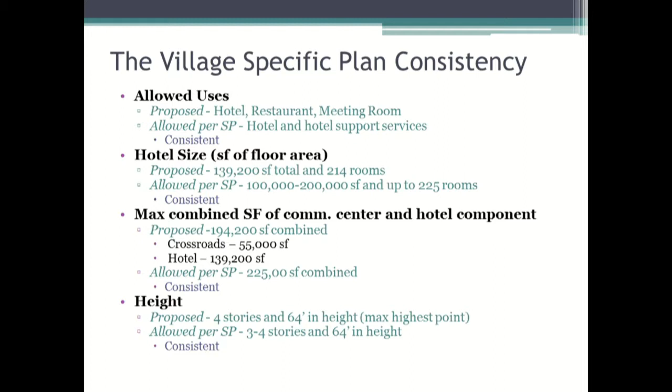So if it's broken down, the Crossroads is approximately 55,000 square feet, and the proposed hotel is 139,200 square feet, for a total of 194,200 square feet, which is well under the maximum allowed per the village-specific plan. The proposed project is 4 stories and a maximum of 64 feet, at the highest point at one of the tower elements, which you'll see in the elevations. The specific plan allows 3 to 4 stories and up to 64 feet in height, so the height component is consistent.

In addition, it is zoned CRSP, so there are standards in the specific plan it has to comply with, but the zoning designation specifically for the hotel site is CR, so any development standards applicable to the CR zone are applicable to this project site. So I thought I would go through a couple of those to summarize how the project is consistent with those development standards.

The standard in the code is 1 parking space per hotel room and 1 space per 5 employees. Based on that calculation, 222 spaces are required and 222 spaces are provided.

Landscaping: the standard in our code for CR zones is that all portions of the setback area fronting streets are landscaped, and along the perimeter of the entire property line, in some places 10, in some places 15 feet, there's a landscape strip of that width. Additionally, there's a requirement in the CR zone that at least 5% of the net site area is landscaped. The plans appear to comply with this requirement, it seems to be at least 5%. However, that's one of the incomplete items we will list, to verify that, do the calculation, and show us on the plans.

In terms of a loading zone, there's no loading zone shown currently on the plans. However, our code for commercial zoned properties does require 1 loading zone, so that'll be another incomplete item we will require them to put in. Additionally, per the village-specific plan, it asks that it's located away from building frontages and away from public uses, so we'll work with the applicant to find a location that will meet those requirements.

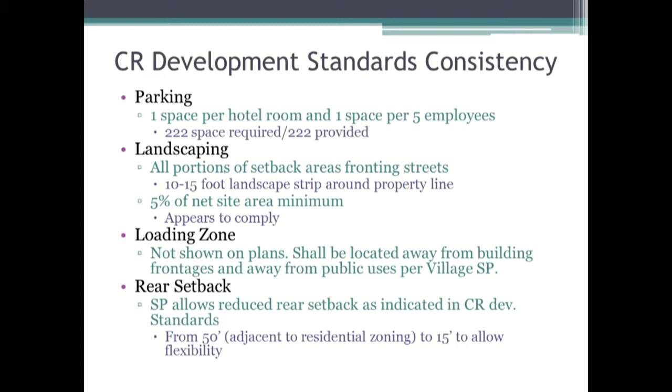This last bullet point is a moot point, but there was a bit of a mix-up in the village-specific plan as well. The CR zone requires a 50-foot minimum setback for any shopping center adjacent to residential uses, and it was listed under the hotel standard. However, it doesn't really apply to the hotel, and in fact the actual standard would be 15 feet. But again, it's a moot point because the closest building to the property line is 60 feet, so either way it's well away from the property line.

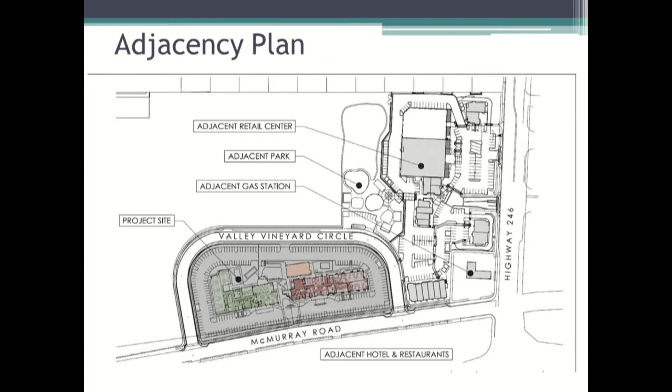I just included this to give you a little bit of perspective. You see Highway 246 over there on the right and McMurray at the bottom, and how it relates to the Crossroads Center and how it will relate, and also the Village Park that'll be going in soon.

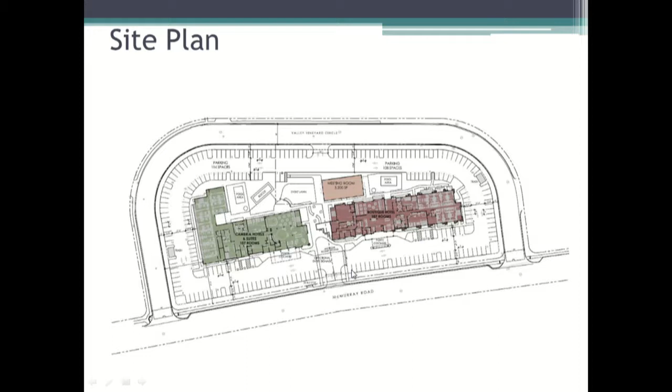I'll talk a little more about the specifics of the site with the landscape plan. There's a lot more to see, but I just wanted to give an overview of what they're proposing. The perimeter of the property will be all of the required parking. You can see the proposed access point along McMurray Road here and along Valley Vineyard Circle here. I'll point out, since I'll discuss it further in the presentation, there's the existing bus stop located pretty near the proposed access point along McMurray Road. Here's the Cambria Hotel to the north and the Boutique Hotel to the south.

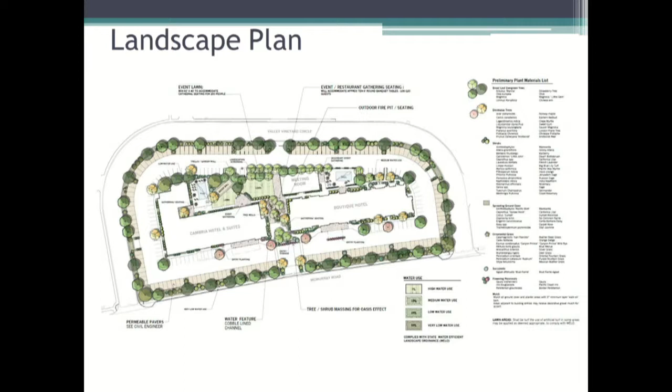I'll go through the elevation. Again, the design style is consistent with the contemporary ranch design style per our community design guidelines.

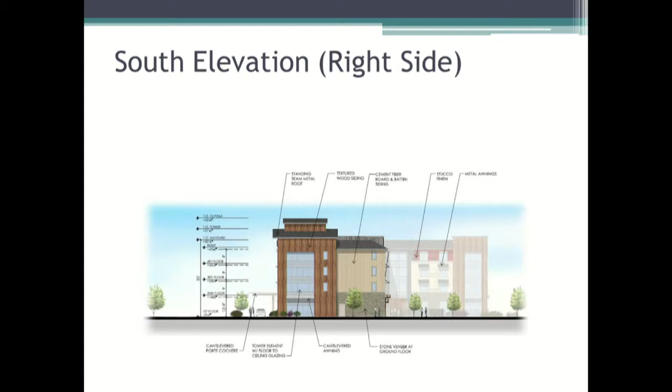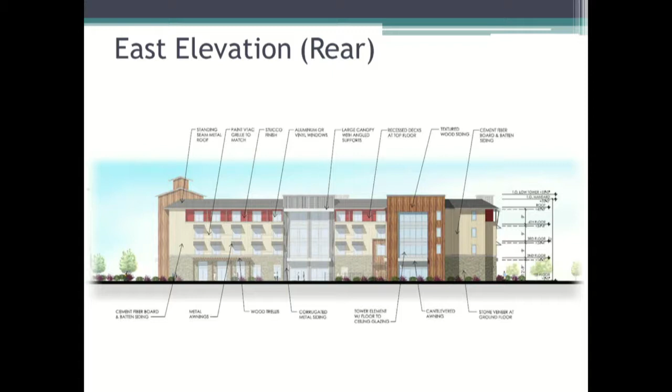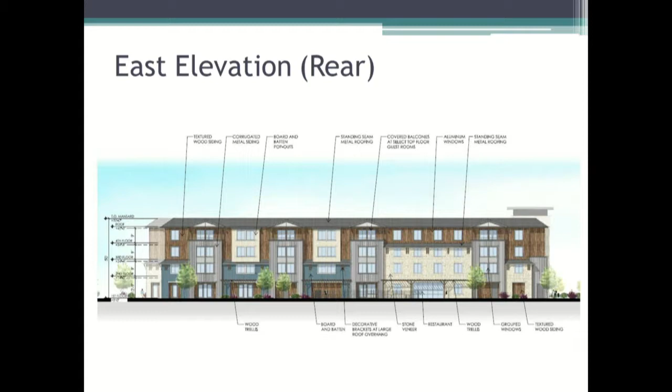This is the south elevation, which would abut the Crossroads Center along Valley Vineyard Circle. And this is what you would see in the open space area at the rear. It appears the blue color is similar to some of the colors in the Crossroads Center, so it seems like they tried to tie a little of that material and color into the surrounding architecture. This is the north elevation, what you would see walking through the two buildings.

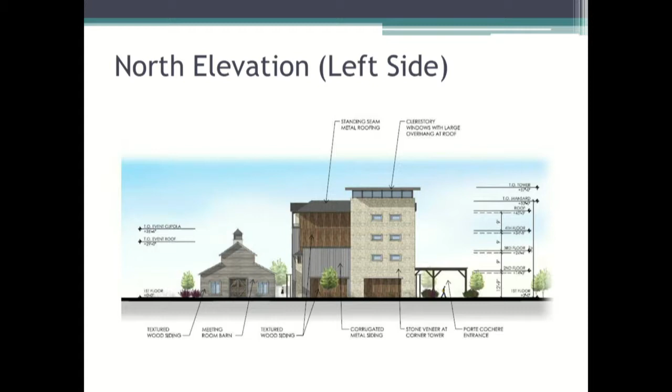The meeting room shows the different materials consistent with the contemporary ranch design style. It's really an accessory building to the two hotels, so it doesn't have as much articulation, though it's still consistent with the contemporary ranch design style, and will be much smaller scale than the two hotel buildings, of course.

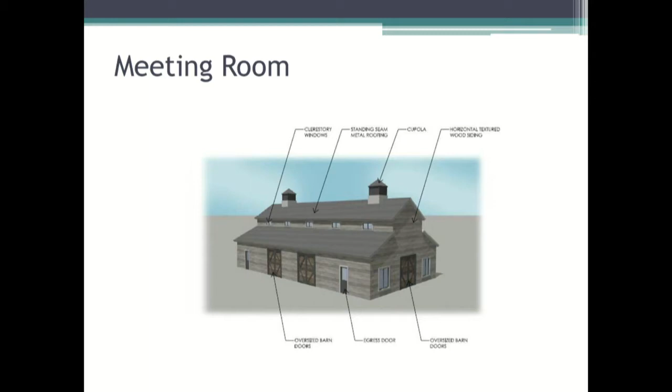To go through some initial comments on the project plans: the parking calculations on one of the architectural sheets need to be clarified. They have enough parking, it's just that the way they did the calculation didn't match up with the requirements, so that just needs to be clarified on the plans.

There's an inconsistent scale bar on a couple of the sheets, showing two scales. I did measure it and there is a correct scale, so just eliminating the confusion by taking that off. Again, one loading space is required for each hotel, and the loading space shall meet the size requirements indicated in the Buellton Municipal Code. Floor plans are missing from the third and fourth floors for both hotels, so those will need to be provided.

This last point, clarification is needed, and when the applicant comes up they can talk more to this. As to what types of events will be held in the meeting room space, they do provide the minimum amount of parking for the hotel use itself. So we want to clarify that the types of events held there aren't necessarily going to include outside events beyond people staying at the hotel. I'll let the applicant clarify their intentions for how they intend to use the meeting room space, but just wanted to point that out.

The landscape plans shall indicate tree sizes, and they shall be a minimum of 24-inch box trees. Again, they must indicate the 5% landscaping on-site requirement. I put this bullet point in here because it was generally clear, but they had a couple tree type options listed, so just being clear on the next plan which tree types they're proposing to put where.

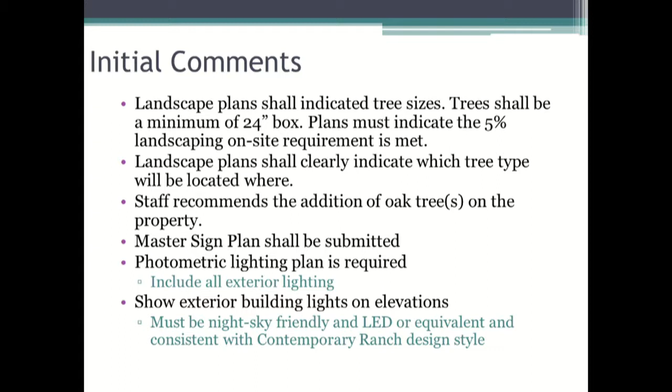A photometric light plan is required and should include all exterior lighting. They should show the exterior lighting on the building elevations, and these lights should be night-sky friendly, LED, and consistent with the contemporary ranch design style.

Initial comments on the tentative parcel map: the map number should be included on the map in the next round. Setbacks from the buildings to the new property lines should be shown—I wasn't very clear on where those property lines were, where the property was split—but basically they should clearly show the setbacks from the building to the new property lines to make sure there are no issues there.

The parcel map will require a cross-access agreement and cross-drainage agreement, since they'll be accessing and leaving the project site on both properties, and using some of the parking areas and circulation involving both properties. So we just need to make sure there's a cross-access easement agreement and cross-drainage agreement for both properties.

This was in your staff report, but I thought I'd explain it a bit more regarding the tentative parcel map and the exception I included. Originally, the Oak Springs Village specific plan was divided into five different parcels.

Then Crossroads came in and further subdivided their property into six different lots, and the townhomes have been subdivided into different lots as well. So similar to what was done for the Crossroads project, for the cumulative total—up to four parcel splits—it would just be a tentative parcel map. Once you exceed that, it's a tentative tract map.

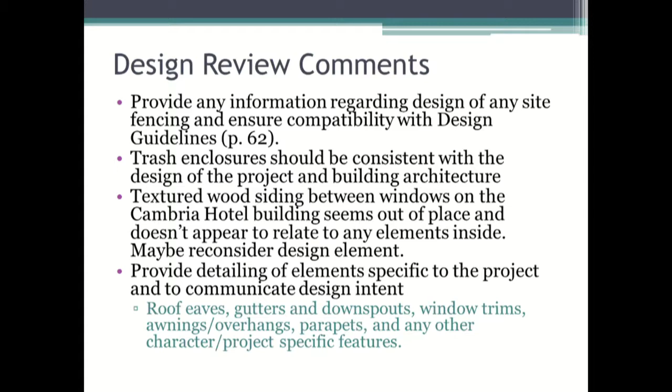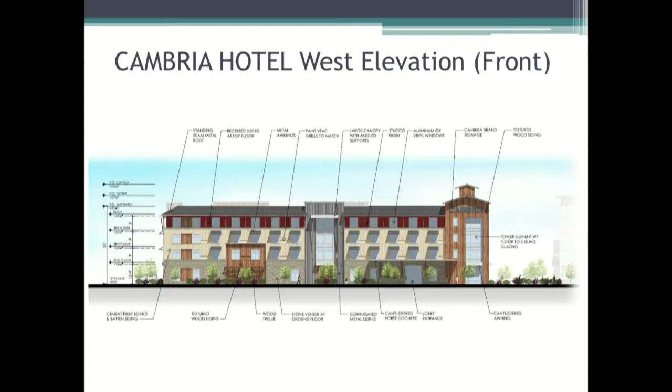And then just providing details of elements specific to the project to communicate the design intent - roof, eaves, gutters, downspouts, windows, trims, things like that. I'll briefly go back and show you on the elevation what the architect was talking about - it's this strip here of the wood siding, it just seemed a little bit out of place. So tie it in a little bit better or do something different with that corner. That was really the only architectural concern.

Okay, so special studies and environmental review. We'll have a traffic analysis of the access point along McMurray Road done by our traffic consultants. In addition, an EIR was prepared along with the adoption of the village-specific plan, formerly known as Oak Springs Village. Any development consistent with the EIR and specific plan typically doesn't require additional environmental review unless there are specific changes needed based on things that might exceed the approvals in the environmental document. Any additional environmental review would need only focus on the specific areas or topics affected by the change, and the final determination of the level of environmental review, if any, would be determined at the public hearing for the project.

So the recommendation is that the Planning Commission provide direction to the applicant and staff on the proposed project plans, and I'm available for questions.

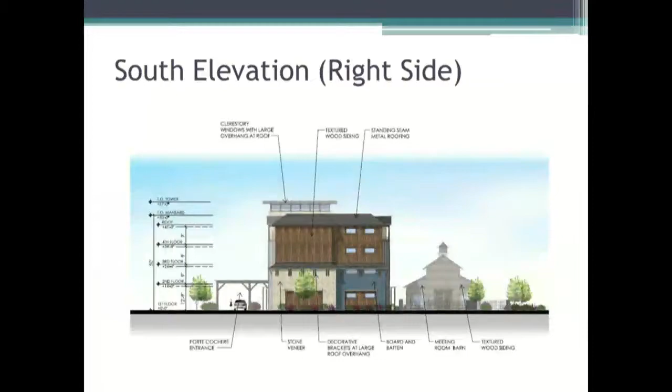On McMurray, will there still be street parking along the frontage? I don't know - maybe Rose and Mark can better answer this. There is currently street parking there, but I don't think it's actually designated as legal. Along the frontage of the hotel there's currently on-street parking, but no designated spaces - just the areas designated with the landscape bulb-outs. With this project proposed, they've got a driveway to the property in the middle of that section of McMurray Road, so that section's going to lose whatever parking space is through that area for the driveway. I think right now that's where the entirety of the bus stop is, which has red curbs, so in theory you're not losing any parking space.

I haven't really overlaid the exact locations for those, so there might not be a complete amount of reduced parking space for the street - we're not exactly sure at this point. But that's just in addition to what they've got on site.

Okay, and then kind of on the same thing - there's the one entry point for the hotel, which really isn't on that map. Is the only ingress/egress for the condos the Valley Vineyard Circle? Yes, I think they may have two points of ingress/egress, but they're all off of Valley Vineyard Circle.

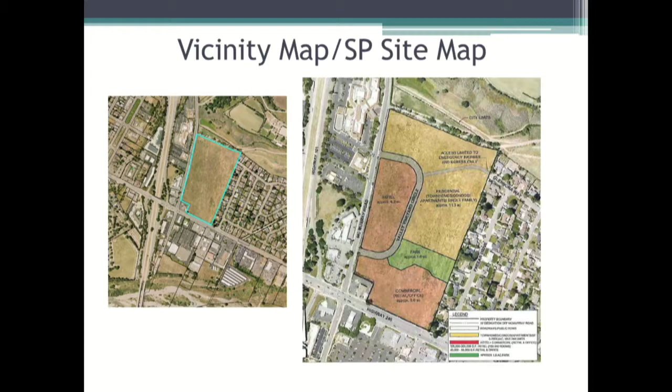Okay, well, we should still keep that in mind. Okay, Marcelo, do you have any other questions? I'm good, you're good? Okay.

Would the applicant like to say a few words? Sure, great. Oh, I'm putting his, he has his. Oh, he has it, okay. Yeah. Excellent.

Good evening, my name is Tom Jess with Affis Studio Architects. I'm representing the client for this project. This is a great opportunity for us to get your feedback, your input. It's been through a number of departments in the city and outside consultants, and gotten their feedback, and I think the project's going to be better as a result. So we're very open to having a discussion about the project. But that being said, this is a project we're very proud of, something we're excited to see coming forward. It's something we're able to fit within the requirements of the specific plan and still get a project we like. So we're not coming in asking for any exceptions, parking reductions, height increases, or density bonuses. We feel it's a win-win. I think the specific plan accommodated what our vision was, and our vision fits very well in that location.

I don't have a little clicker to change. Oh, okay, perfect. So what I wanted to do, I think Andrea did a great job of walking you through all the specifics, so I'm not going to reiterate what she did, but I thought I'd talk a little bit about the vision and what drove the design to this point. The site plan and landscape plan do a really good job of illustrating that. If you can click one more, I'll just walk you through the idea here.

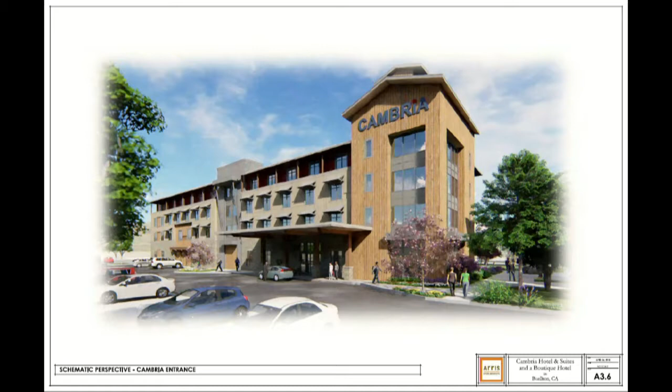We've created the awnings on this side. This is going to be the west elevation, so it's going to get lots of light. The awnings are going to help cut down some of that and also create some shadow and depth to the elevations, and then set back the top floor to create a crown on the building, the top floor of the building there.

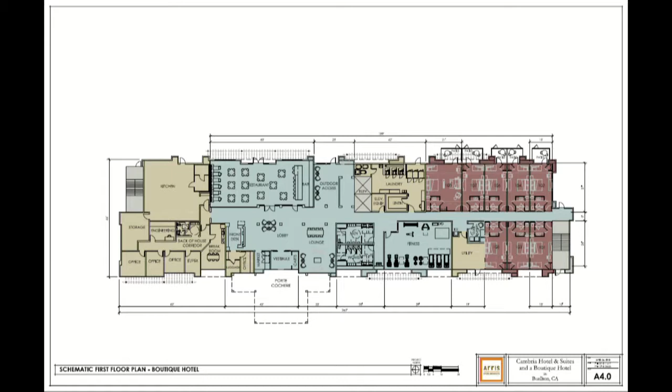If you can click one more. The boutique hotel, which is on the other side, takes a similar approach with a restaurant, seating area, and outdoor access from the lobby. You'll be able to see right out to that back area, and I think you can see that carries through.

You can see the porte cochere. The architecture is a little bit different. The Cambria is a little bit more contemporary. It has a cantilevered porte cochere and some of those elements, where this one has more of a heavy timbered porte cochere. But a lot of the same vocabulary - similar stone, similar wood batten siding and distressed wood siding.

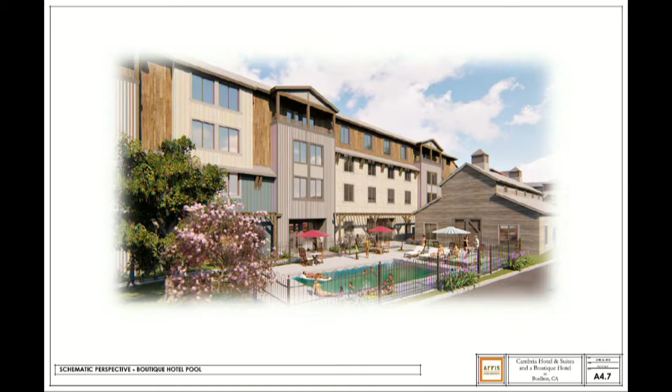And then the back, you can see here's the pool area, and then the barn or the meeting space is kind of accessory to both of those, and opens up onto that lawn area. I think if you click one more.

That's kind of about it. I didn't want to take a lot of time and reiterate a lot of what Andrea said, but we're more than happy to answer any questions you have. Once again, we're very excited about seeing this project move forward. Thank you.

Thank you. Do you guys have any questions for the applicant?

So my continued question on the boutique hotel part - is that restaurant bar planned to be public, or will it just be guests only? I think like any hotel bar, they would love to have guests come in, but I don't know too many people that like to go to hotel bars and restaurants on a general basis.

So the Cambria specifically, it's more of a breakfast area, and they do serve drinks in the evening, that type of thing. But the boutique would be almost exclusively for the hotel guests. Oh, okay.

Just as a point, might have some interest from the condos in the back. We would love to - I mean, don't get me wrong, they're not going to turn anyone away, but it's going to be difficult to market because hotel bars.

Can I add one thing as well? As the Marriott is an example, they do not have any additional parking for their bar or their food area, so this would be similar to that. The parking calcs kind of take all that into effect because probably not going to have every room booked, so there's still flexibility. It's similar to the situation at the Marriott.

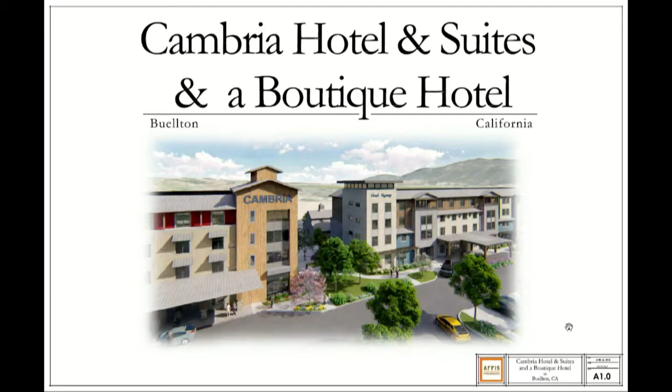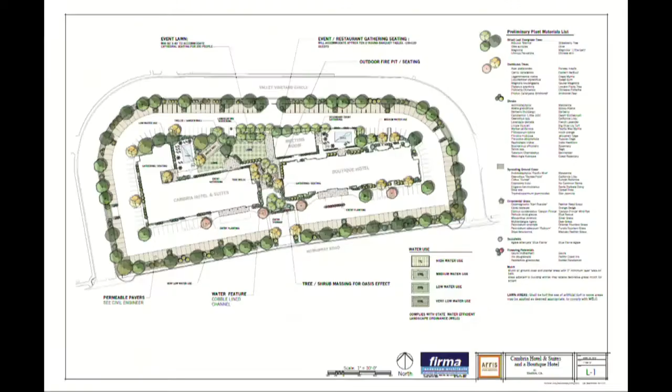So that's it, that's just my preference. That's the only other feedback I have.

Okay, well, it looks like that's pretty much the feedback we're bringing to the table. I know this is a preliminary review, so there's not really a vote at this point, but that would sum it up for us. Thank you, it was a very good first complete submittal. The master sign program and things like that are things we always ask for afterwards, not on the initial submittal, but this was a very complete first submittal, so it helped our review and helped the commission's review as well. I was thinking the same exact thing as we went through this past week. Thank you guys for putting together a great project. Thank you. Okay, let's move on.